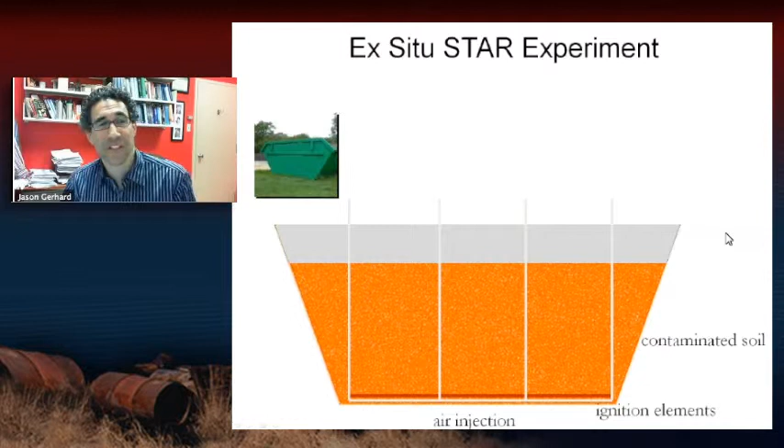We did this demonstration about 5 years ago now. We did it on the cheap with some research budget. This is before any big companies were involved. And we basically took a skip, or what you call a garbage dumpster, and filled it with contaminated soil, and basically ran a large column experiment inside that dumpster. And so just like with everything else you've seen, we do ignition along the bottom, and we get this upward propagation of the reaction front. That's the idea. And hopefully clean up a whole skip full of contaminated soil.

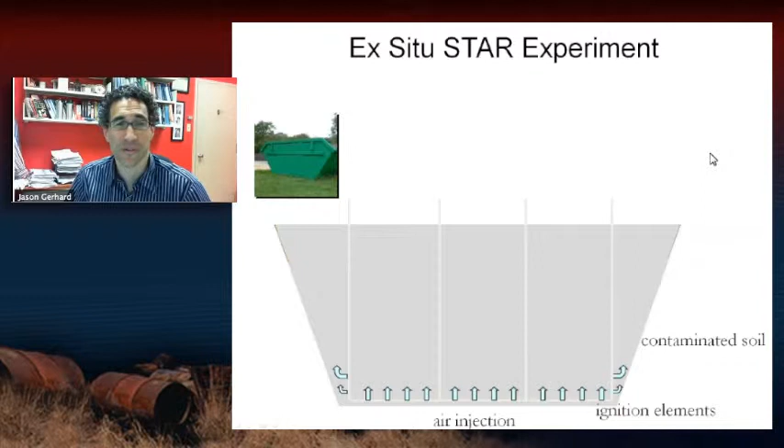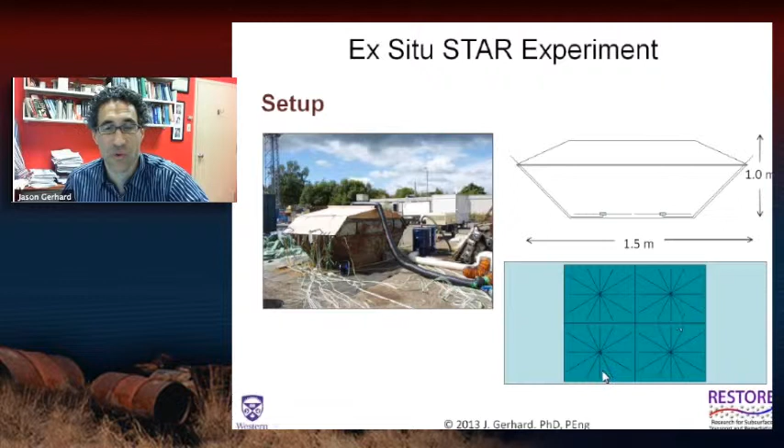So this is the experiment we did in Glasgow on the order of, I gotta say, 5 years ago. And we purposely mixed coal tar with clean sand to create a mixed contaminated soil to our own description. And here's a plan view of the air distribution radial pipes, and the igniters were located in these 4 quadrants on top of these pipes. Here's a side view, and basically this is what it looks like.

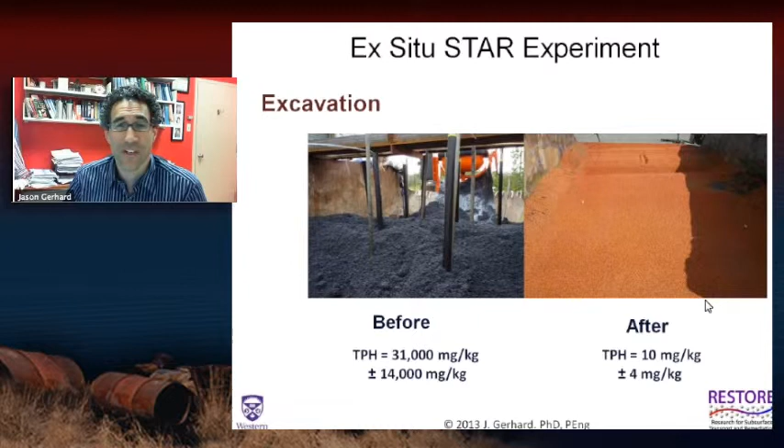This is a photograph of what it looked like before we did the test, and this is a photograph of what it looked like after. It took us about 15 hours to have the reaction propagate up through this zone. It was about 1 meter tall, and it took about 12 hours for it to cool down before we could excavate it. And we got very typical results, again, on the order of 31,000 milligrams per kilogram before, and pretty much clean sand afterwards. You can see, again, this sand had a sort of a reddish tinge to it afterwards because of the iron oxide in the sand. So very, very encouraging.

And it was this kind of result that allowed us to work with a major oil company to develop a prototype ex situ reactor, because, as I said, they have these tank bottoms that they want to treat. Now, the tank bottoms themselves are not a soil. They have a bit of silt and grit in them from the reservoirs where the oil's been pumped out of, but mostly it's just liquid. So it's already on the surface, it's already excavated, sitting inside a lagoon or in a pile, and what we want to do is mix it with sand, treat it in a reactor, get the clean sand back out, and reuse the sand over and over again, mixing it with the sludge and treating it over and over again for very little cost.

So basically, here's what the system looks like. It's basically an igniter that we use during ignition only. The front travels up, it gets clean, it gets dumped out, and it gets done over and over again. We're also working on a continuous system. The reaction would continuously be in here. We keep feeding in fuel from the top, and the reaction would stay inside the reactor. But for the moment, we're starting off with a system that is batch. You treat the system in batch.

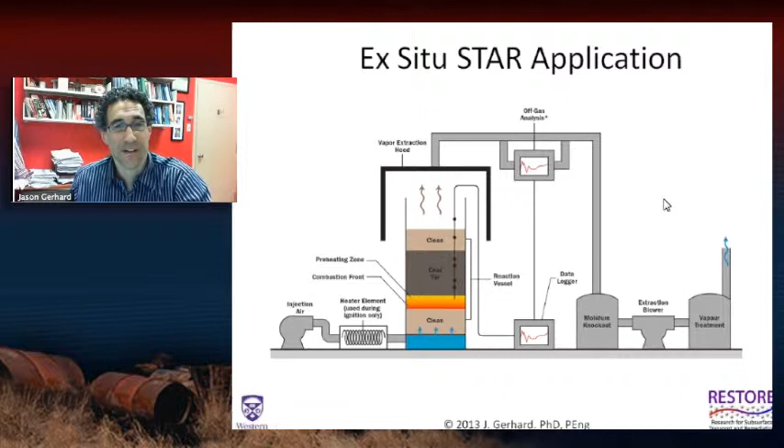And you can see that we have an extraction system, we analyze the gases, and then, just for total safety, even though we have very few vapors, we still treat them with activated carbon and then release the clean air. So this is what it looks like. We've built this over the last year and a half. It's in London, Ontario here, at one of our research facilities. We've partnered up with this company, GTI. They've been fantastic partners. They're experts at fabricating reaction vessels, basically.

This is a 3 meter tall, 1 meter diameter version of our column experiments. It has a very nifty hydraulic mechanism that allows the bottom to come off, to dump out the clean sand. We then put the bottom back and the locking ring closes, and then we actually have a sand elevator here. We have big buckets of sand, a sand reservoir. It brings the sand up, mixes it with the sludge, and dumps it into the top. So we have a loading system. We have an unloading system.

The sand falls down into this bucket here. The ignition system is in the base here. We have air being blown up through here and then collected out the top. And these are thermocouples located all throughout the system, so we can track temperatures. And what's very interesting is the entire apparatus, which is several thousand kilograms, is on these very sensitive load cells. So we can track mass loss as a function of time in real time. And basically, this is a pilot scale, so maybe it's on the order of 1/3 real scale.

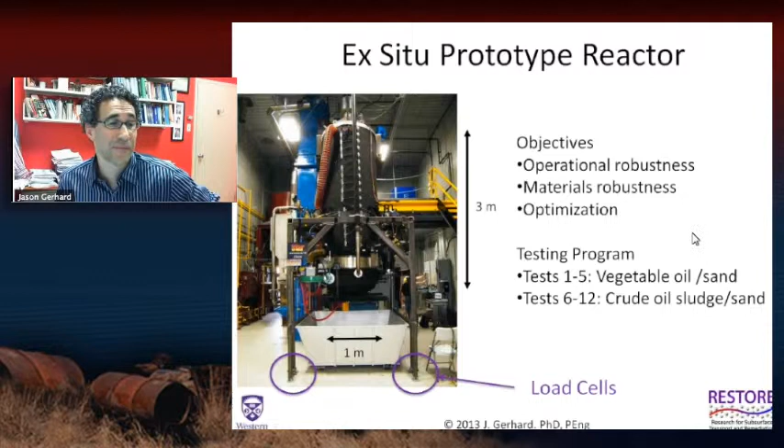The first 5 tests were with vegetable oil, which is a good surrogate contaminant. And then the next 7 tests were with the actual crude oil sludge. So here's an example from one of the tests of the mass destroyed as a function of time. Now we're not using an indirect measure of CO, CO2. We're using a direct measure of the weight of the reactor as a function of time.

So you can see it's basically a linear reaction as the front propagates up the column. We're getting a linear rate of mass destruction. And you can see that the mass destroyed is almost exactly the initial mass added. We basically have nothing left. There's a little bit of sludge that's below the igniter in the reactor, and that's this difference in weight here.

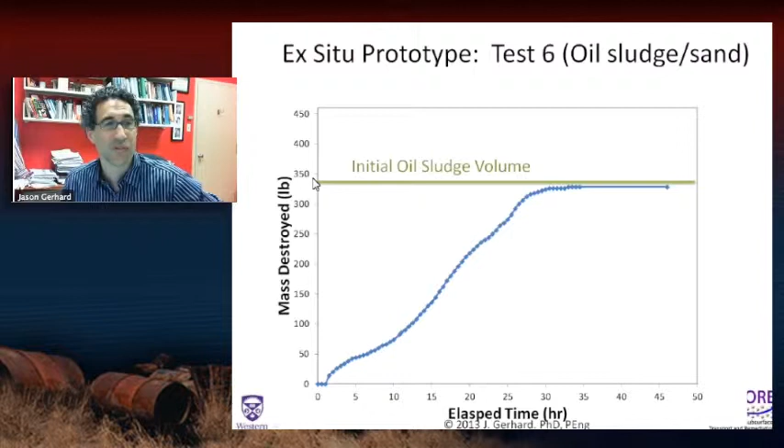Because the treatment, of course, doesn't go down. It only goes up. So there's a little bit of mass left below the igniter, but everything that we tried to treat was completely destroyed. And it took on the order of 35 hours to destroy those almost 350 pounds of sludge. So that's very encouraging. And here's a video of how the temperatures evolved, how the front moved through the reactor as a function of time.

This zone down here is a contaminated zone, and in this test, half of it was contaminated, and half of it was clean sand. So here you can see the reaction starting, the heater's off, and you can see the front moving up, and we see a much thicker front than we did previously. We see a lot of the heat being retained inside the clean sand. So basically we have a very strong reaction propagating up through the soil.

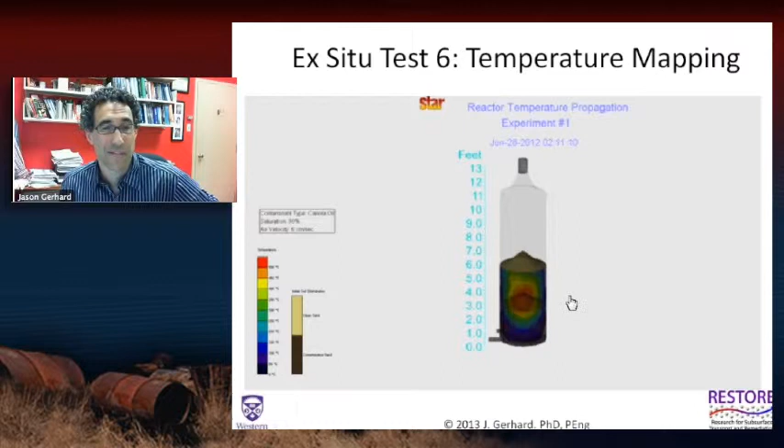You see a strong reaction propagating up through the soil, and then a lot of heat being retained in that clean material at the top, and it very slowly cooling down over the next day or two. And this is what the material looks like. This is the sludge at very high concentration. Of course, we're mixing it ourselves, so we can mix it at any concentration we want. So we pick a very high concentration.

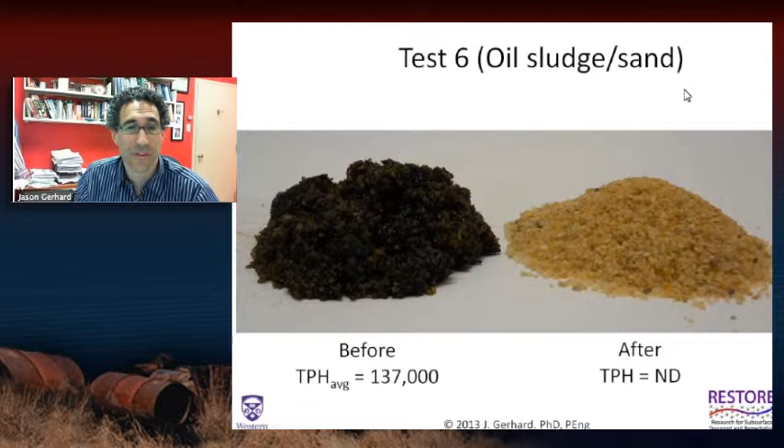And this is what it looks like afterwards. Very, very encouraging. Very similar to our treatability studies. So ex situ STAR is looking very, very good. Of course, there's some advantages over in situ, which is one, you can homogenize the soils and heterogeneity is less of an issue. And of course, it's highly controlled. We can optimize the airflow rate. We can optimize the concentrations as we want them.

If it was too fine of a material, we could add a coarser material. We could do whatever we wanted. We see treatment just like the column tests. We see the possibility for treating liquid wastes that we intentionally mix with sand and we recycle the sand. We see that we could have, for example, a treatment center where we mixed really high concentration waste that had lots of excess energy with some low concentration waste.

Remember, I mentioned that there's some soil that we can't treat normally because there's not enough fuel there. Well, in this case, we can mix the two of them together, throw them in the reactor at the same time, and therefore treat both at once. And of course, we also have design plans for a mobile treatment system that would drive around to different sites. So we could do excavated materials, but not having the excavated material leave the site, which can be a big advantage.

And the treatment's so thorough that some of the soil we've done has been classified as being good enough to be put back into the ground, which for most technologies, you could never do. Even after you treat it, you still have to send it to landfill because it hasn't been treated enough. And if you're trying to, for example, bioremediate petroleum hydrocarbons, that's a typical result. You knock it down a lot, but you don't knock it down enough to reuse it.

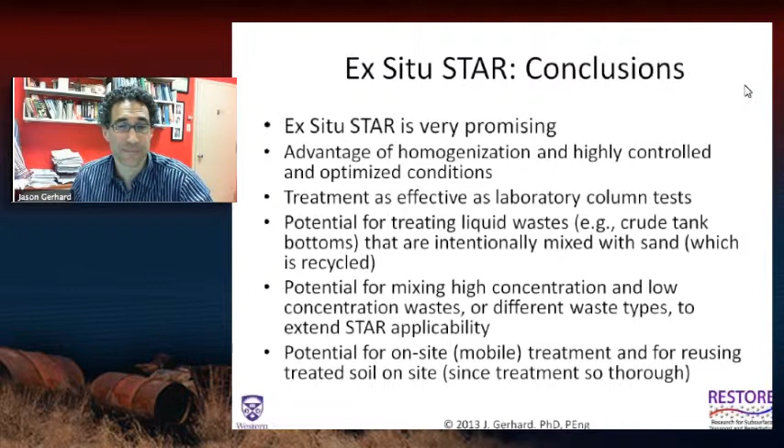The question I have here is, first of all, the comment: that's incredible, forget in situ and just do ex situ. I agree that the ex situ looks very promising. But you have to understand, as I showed you in the sustainability analysis, excavating all soils, first of all, is incredibly expensive in terms of energy.

Second of all, it's hazardous. You're bringing hazardous material up to the surface where it can volatilize, get in contact with people. In many sites, it's either too deep, or it's too expensive, or it's too hazardous to bring the material to the surface. So in situ has a lot of advantages. Of course, there's challenges in terms of the in situ heterogeneity and things like that. But in many cases, in situ treatment is an important alternative.

So thanks, though. And the other question was, could you potentially sell the clean fill? I think I've answered that. Yes. In this case, the material is so clean that there's a lot of potential for putting it back into the site, using it as fill on a development site. It's even been classified as clean enough for fill into harbor development projects where you need to put things into the lake. So those are all possibilities.

The one issue that should be brought up is that it has no organic material in it whatsoever. So for people who are concerned about the viability of the soil as a growing medium, and that can be important if it's a superficial soil, like a potting soil, you have to understand that, like any thermal technology, you're not just destroying the contaminant, you're destroying all the organic carbon. So the organic carbon is lost, and it becomes sterile. You also lose all of the natural organisms that exist there.

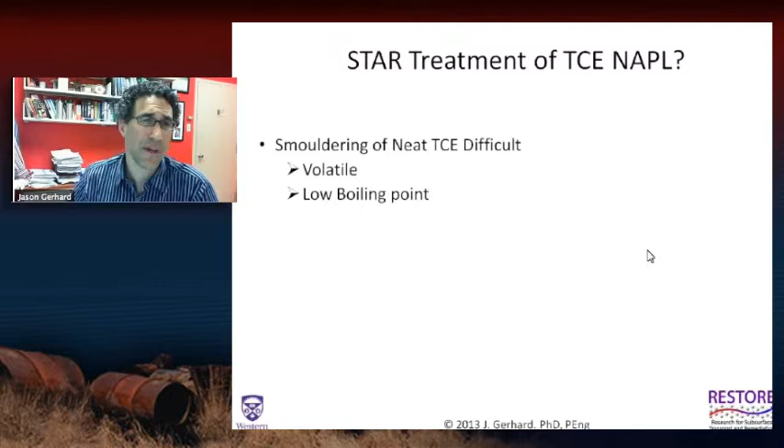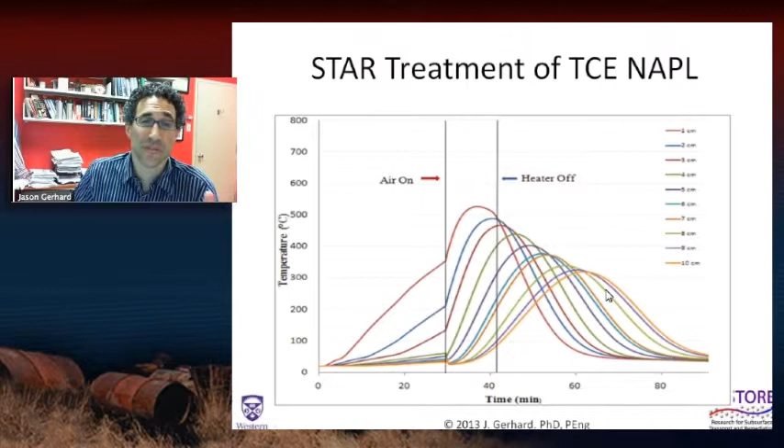So we know already that in a lot of sites where there's chlorinated solvents, we typically inject vegetable oil as an organic substrate donor for aggressive bioremediation. And we know that vegetable oil has a lot of calories, a lot of energy, and it can mix with the DNAPL very effectively, so that they coalesce into a single phase.

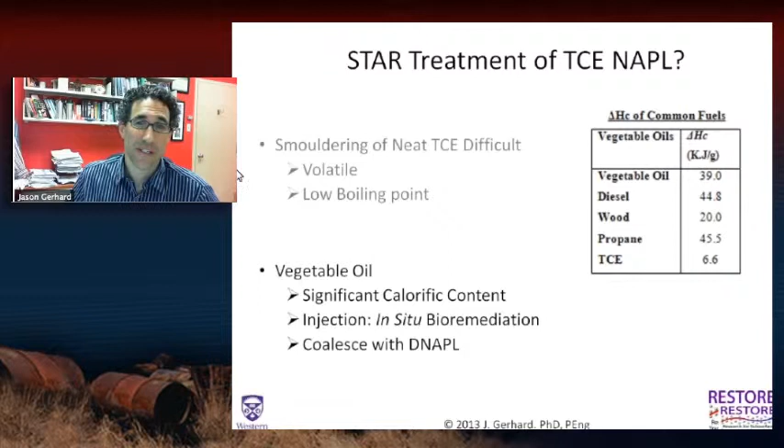And here's the energy content of various fuels. You can see that propane and diesel and wood have fairly high energy content, just like vegetable oil, whereas TCE itself has energy. It can be combusted. It's often incinerated, for example, in an ex situ treatment system, but it doesn't have a lot of its own energy.

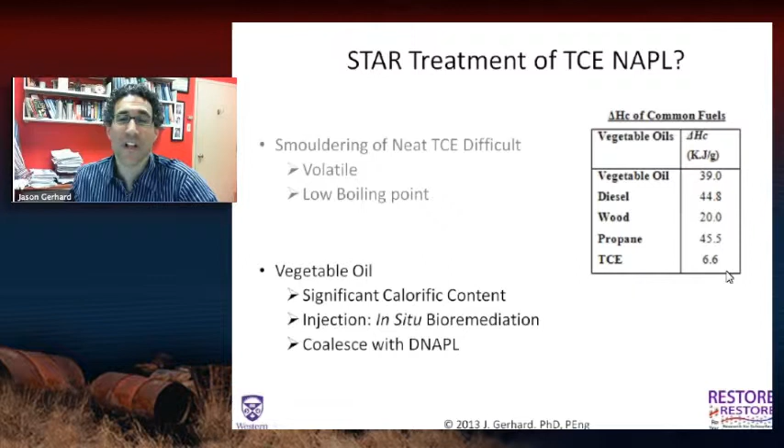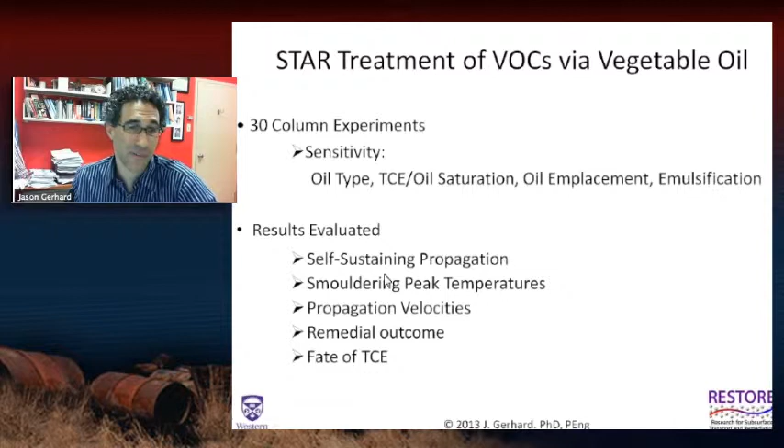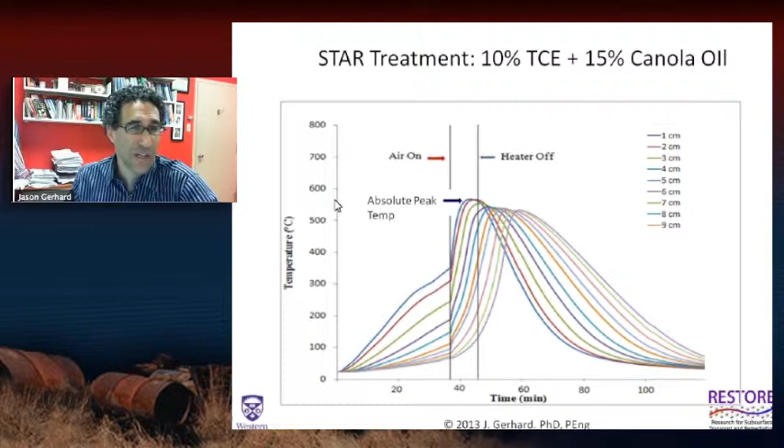So we did a whole suite of experiments where we looked at whether we could use vegetable oil as a surrogate fuel for remediating VOCs, and we looked at all of these factors. This is what happens when you take TCE at 10% of the pore space saturation and mix it with 15% saturation of canola oil. Now we're getting a very nice self-sustaining front, peak temperature about 550 degrees.

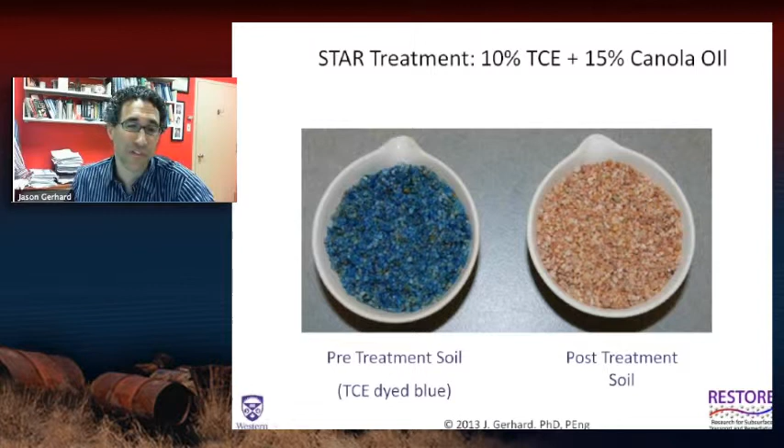And here we used an oil blue dye. This is the blue dye TCE before and after. So we know that there's no TCE left, and there's no vegetable oil left either. And we did a whole bunch of different oils, and we saw that canola, sunflower, and peanut oil were all very promising, strong self-sustaining reactions.

Soybean oil, olive oil, and corn oil had the potential, but at the scale that we were studying them, we couldn't say they were completely self-sustaining. We would need a larger scale test to know for sure. We also did a biofuel, methyl soyate. In that case, it was really not self-sustaining at all.

So I can't tell you why. These all have very similar chemical formulas. So it's hard for me to tell you. I don't know yet why some are better than others. We just know that it's true.

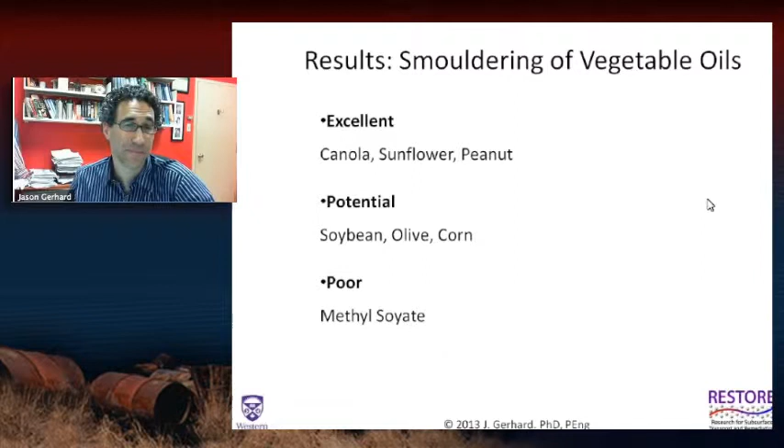Now, what's the fate of the TCE? Here you can see that the initial experiment, one of our base cases, 10% TCE, 15% oil, had 1.3 moles of TCE in it, and this is the mass balance. We measured the TCE in every phase. We basically got 1 mole of TCE being volatilized ahead of the front. At the end of the day, 0 moles of TCE was found in the soil.

It was completely clean. There was a very small amount of gaseous PCE, because you should know that if you incinerate TCE, sometimes one of the byproducts is PCE. So we're measuring PCE, even though we didn't actually add any PCE. A very little bit is being generated in the thermal breakdown of the TCE.

And we also measure for phosgene. Now, phosgene is a chlorinated toxic gas of significant concern whenever you're incinerating TCE. So we measured very carefully for phosgene, and we saw incredibly small amounts, much, much less than the regulatory limits of phosgene. So that's promising.

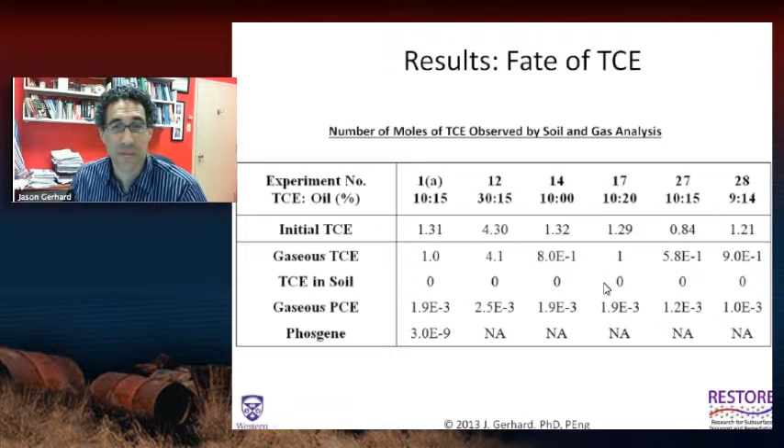Now here's a whole bunch of experiments that shows very similar results. So we did some with more TCE, with less TCE. We did a whole bunch of experiments, and basically none of them had TCE left in the end. And all the results were very similar. Very little PCE generated, a significant fraction emitted as TCE, and the rest of it being combusted.

So if we look at it on a graph, we can see that in every case we remediated the soil, about 3/4 of that TCE was being volatilized, and about 1/4 of it was being destroyed. A tiny bit was being emitted as PCE. So on one hand you might think that's disappointing, because STAR was so successful with destroying with very little emissions for the coal tars, creosotes, and crude oils. But the truth is, this still has a strong potential.

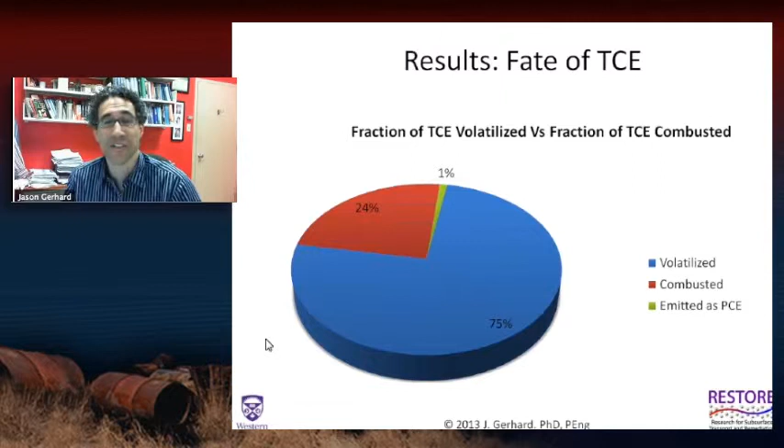Other ways that we treat TCE are, for example, volatilization, either through thermal, which means injecting a large amount of energy into the soil for maybe 6 months and volatilizing all of it, so you're trying to heat up the entire site at once to maybe 100 degrees. Or you're doing air sparging and purposely volatilizing. So there's a lot of ways of transferring TCE to the gas phase. And this just might be a very cost-effective way of doing that, and destroying some of it in the process.

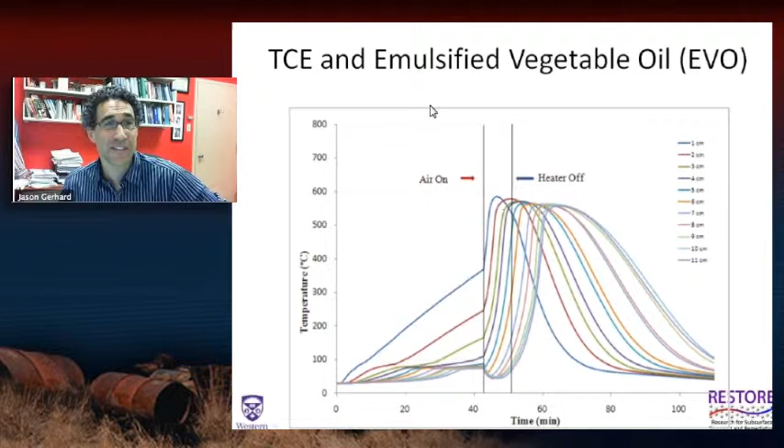Here we looked both at neat oil, and of course at emulsified vegetable oil, because when you inject oil into the ground, if you want to get a good radius of influence around your injection well, you often inject emulsified oil, which is basically droplets of oil encapsulated inside water, so that you can push those droplets further away. So we did it with EVO and TCE, and we had equally good success, which is promising.

Now in this case, we're pre-mixing the EVO, the TCE, and the soil. In this case, we took a clean sand column, and we injected vegetable oil and TCE. So we injected TCE first, and then drained it to residual. Then we injected vegetable oil, and then drained it out as well. And then we did the reaction. So we're trying to do things closer to what would happen in the field.

And what you see is we don't have nearly as nice a set of curves, because there is some heterogeneity. There's some places that are more packed than others. There's some places that have more fuel than others, some more oil than others. But what we see is basically the reaction does propagate through the entire column. Remember, these thermocouples are only on the center line. So it could be moving in a kind of heterogeneous fashion.

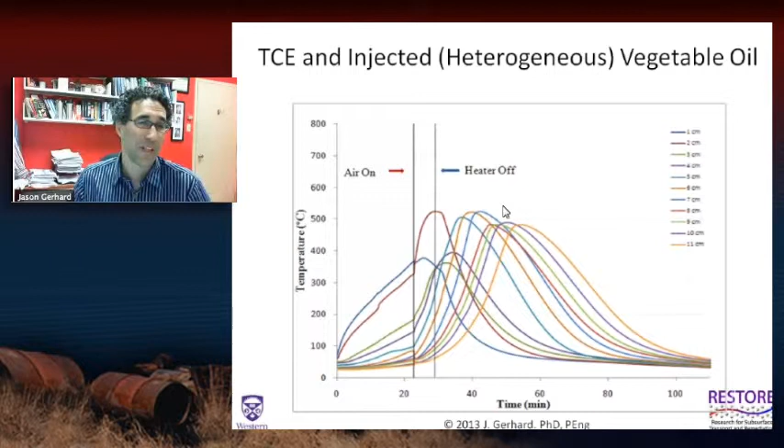But in the end, the entire column was completely clean, and there was nothing left in terms of oil or TCE. So we do see that there's good potential for remediating any kind of volatiles using vegetable oil as a supplementary fuel. Certainly really cheap and food grade oil. I mean, whenever you want to inject something into the subsurface, it's nice to inject something that's food grade and has no toxic implications.

It's also likely that any oil that you don't smolder will probably support ongoing bioremediation. So we're looking at that now as well, coupling STAR with bioremediation. We saw that there is a minimum of oil that you would need. So, for example, we needed at least 14,000 milligrams per kilogram of oil to destroy 8,000 and upwards milligrams per kilogram of TCE NAPL.

But 3/4 we were volatilizing, 1/4 destroying, and everything was totally clean afterwards. So there is some potential there. Whereas a few years ago, if you asked me, I would have said that there was no potential for volatile fuels. So that is encouraging.

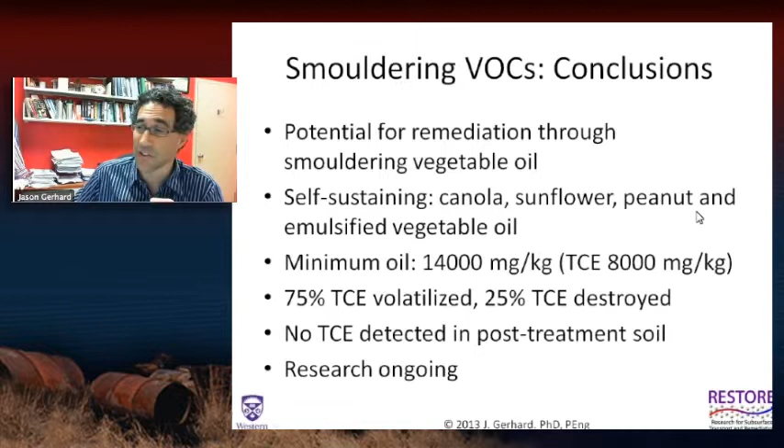Is there a risk of volatilized DNAPL transferring to the dissolved phase groundwater as it contacts the cooler groundwater on the fringes of the treatment area? And so yes, that is true. If you were doing treatment at depth, then you can have some of the gas phase partition into the groundwater. Now, probably if you're dealing with a TCE contaminated site, that groundwater already has TCE in it. So it would be site specific. I'm not sure if you're going to create a groundwater plume where you didn't have one before.

As you continue to sparge more and more air, you'd have some forward transfer of TCE, let's say, into the groundwater. Then if you continue to put air in, even after the reaction is done, you might have back partitioning out of the groundwater. So, as I said, there might be already TCE in the groundwater, but there is the potential for that. It's not something that we've studied in depth, but it is something definitely to keep in mind and consider.

Now, it also depends if you drive off all the water or not, depending on how shallow you do. For example, in our shallow in situ test, the reaction was so strong, it basically dried out that entire cell. And then groundwater flowed back in later, but there was no water between the front and the surface. So in that case, you don't have to worry about contaminating the groundwater. But if you're doing it very deep, then probably you are transferring the hot gas through cooler groundwater, and so that becomes more of a consideration, for sure. So thanks, that was a good question.

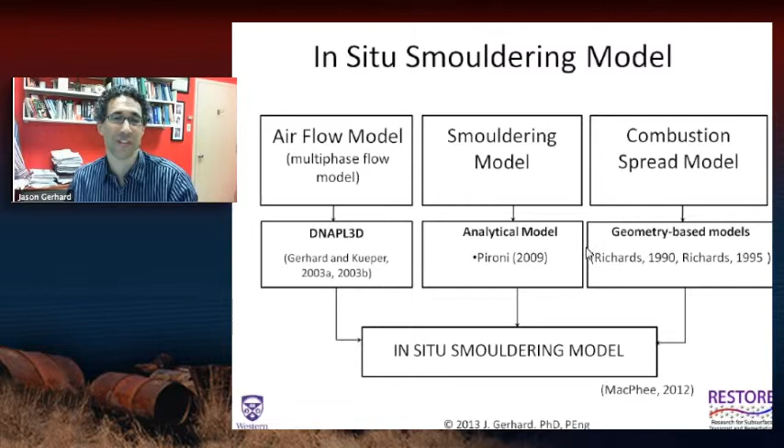So in this type of modeling we're not modeling the detailed physics of the hundreds of reactions going on inside the front. We have another model where we're trying to do that, but it only works on the scale of centimeters because it's so numerically complex. Here we're trying to make a model that's not as complex, but we can actually use to do field scale simulations. So we're trying to incorporate just what's essential of the processes going on.

Now, this is pretty complicated. I don't expect you to learn this whole thing. I just want you to get an idea that we have a multi-phase flow model that solves for the movement of the NAPL and the movement of the air. At every time step, it solves for the air velocity vectors throughout the pore space, where the air is and how fast it's moving, and the concentration of NAPL at that location. That's a model I developed during my PhD.

Then we feed in the concentration of NAPL at every location and the direction and magnitude of the air velocity vector. All of these things and the porosity of that location get fed into this reaction expression, which calculates the velocity of the front.

Because a lot of these things are constant for a given fuel. And then, oops. Oh, okay. So for a moment, I just want to mention now, this expression has a calibration parameter. So what we did is we took all of the column experiments that we did, and we developed a calibration. So we get a certain velocity of fuel, of contaminant, for a given air flux.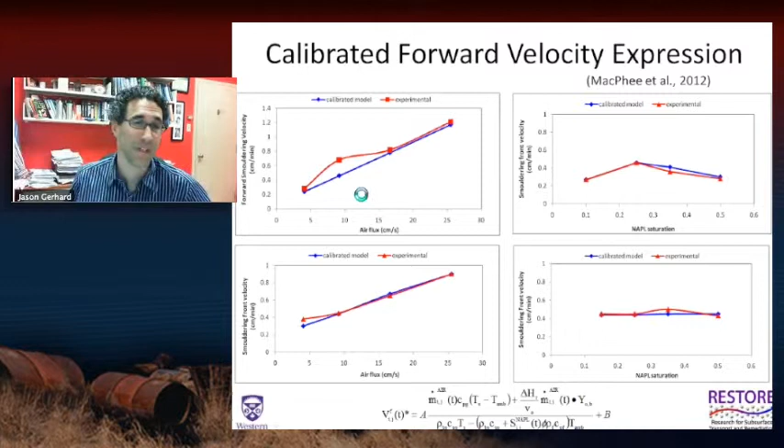And at each node in the model, you can have a different saturation, and you can have a different air flux, and the model will give you a different velocity. Okay, and that's solved on a node-by-node basis throughout the entire domain. All right. Then, basically, it goes into a module that calculates if it should spread. Because remember I told you if the airflow is too low, there'll be no reaction, so that's what this is. There's an off-on criteria here.

If it's below the criteria, then the front doesn't spread at all. If it's above the criteria, then we use these values that we calibrated to our two-dimensional experiments, and it creates a front that propagates outwards from the ignition point. And then what it does is it just iterates to basically make a nice smooth front, and then it removes instantaneously all of the NAPL behind the front.

So this is how it's not a true chemistry model. It's not actually doing the stoichiometry of reaction. It's calculating where the front is in space and time, and the movement of that front, and everything behind it is removed for NAPL. But that's really an important step, because when you go back into this time step, then the saturation distribution changes, and that changes the airflow pattern. And that's why I was telling you before, you can't just predict where the airflow is going to go and assume the front's going to go there, because here is a very coupled process.

The airflow is very dependent on the NAPL distribution. As you know, hopefully from other courses, when you have lots of NAPL, it's hard for air to flow, and where there's little NAPL, air can flow well, right? And so you can imagine that there's a clean zone through which air is moving very, very well, and the air can propagate from your ignition point right to the front very easily. And then when it reaches the front, of course, it doesn't move through that front as effectively. And so there's a coupling here between the airflow and the NAPL saturation, which is affected by the propagation of the front. And it helps deliver air right to the front.

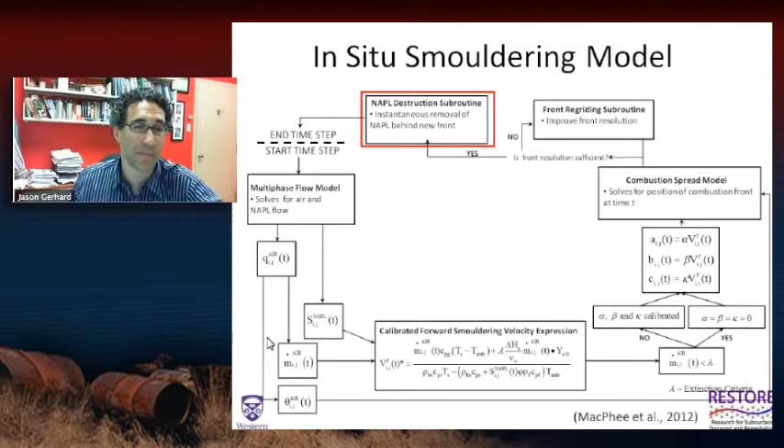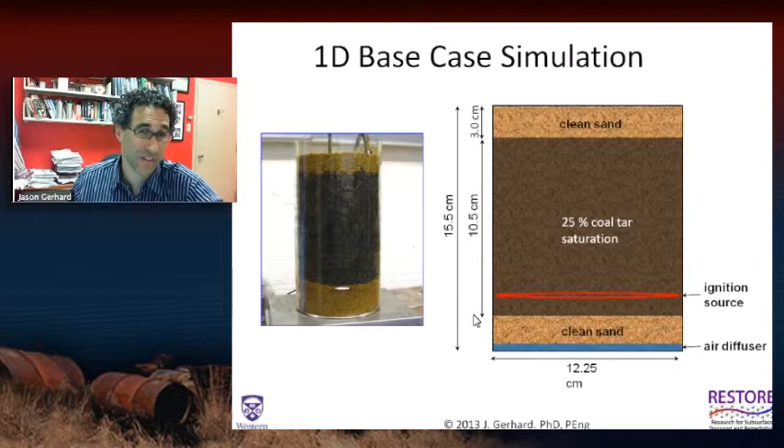All right. And the nice thing is, I should mention, it also accounts for water saturation. But of course, if there's a dry zone behind the front, then it also allows the air to reach the front very effectively. Okay. So here's the column experiment I showed you way back about 2 hours ago. And here's the propagation of the front up the column in terms of the simulation. Okay, so here's the air velocity vectors, and of course, they're uniform. This is a 1D experiment. So the air velocity vectors are going upwards uniformly from the air diffuser at the bottom.

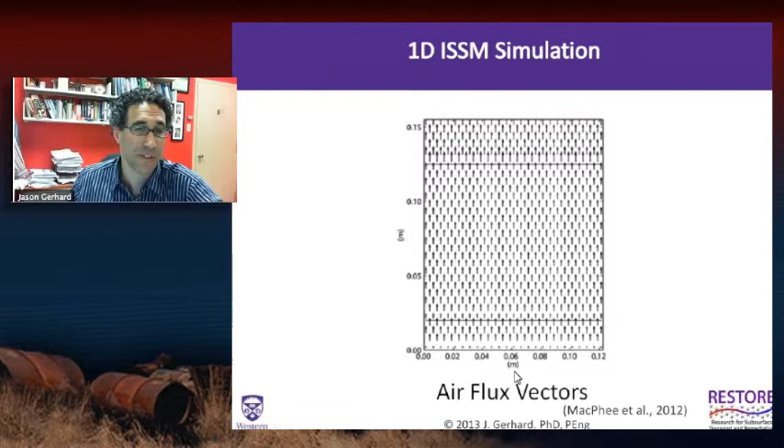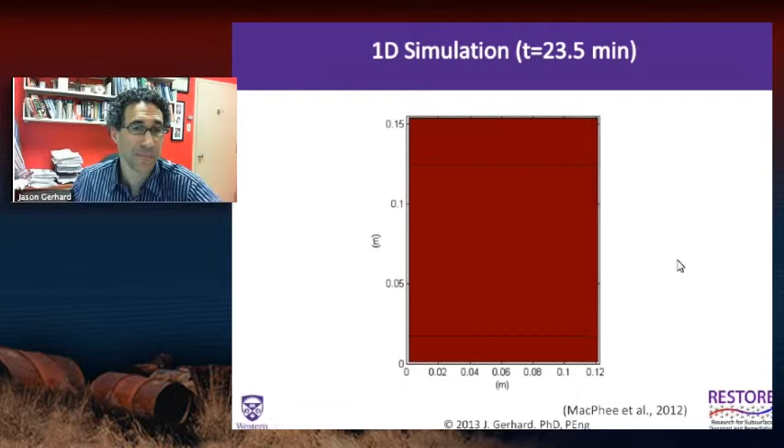And here's how the front is simulated. Here's the igniter at this location. Red here is clean. Blue is contaminated. And here it shows the front propagating upwards as predicted by the model as a function of time until the whole column is clean. It takes about 23 minutes to clean up this column. And that matches very, very well with the experiment. Now, of course it matches well because we calibrated the velocity of the front to the experiment. So it's just encouraging that it matches, but not really revolutionary.

Here's an experiment. Now, this is something it's very hard for us to do in the lab. We've taken the same sandbox now, and we've done 3 different permeabilities: a very low permeability material, a high permeability material, and an intermediate one. Okay, because we want to start to study. And now, instead of doing a line source, we've done a point source, because we want to really study how heterogeneity might affect the propagation of the front. So this we don't have any confirmation for. This is a prediction of the model.

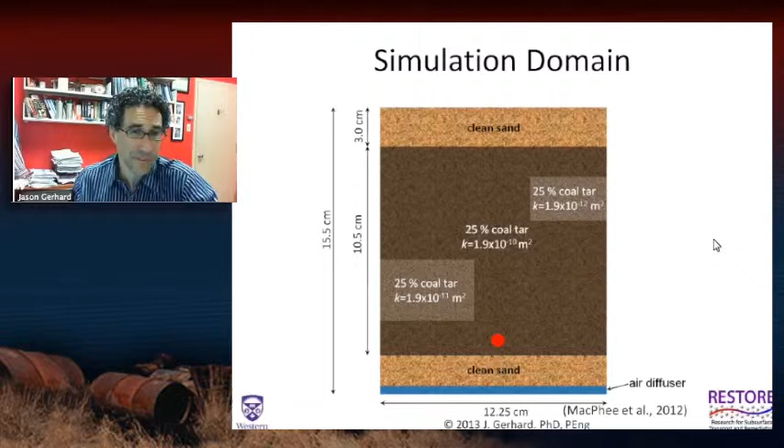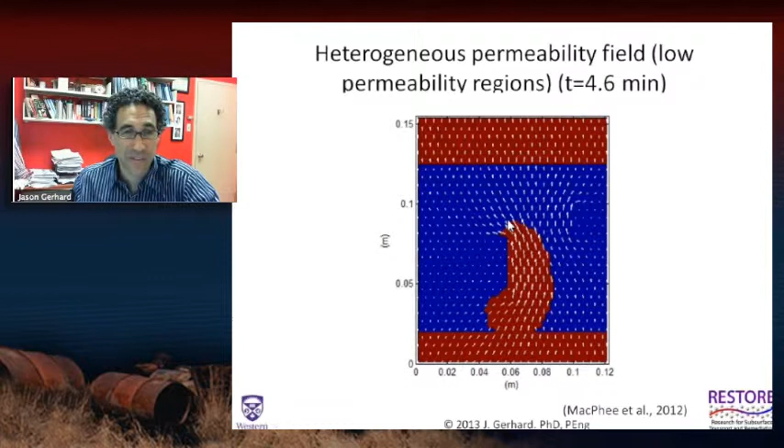So first of all, here's the airflow pattern that's predicted at time 0. And as you can see, as you imagine, most of the airflow is channeled through the coarse sand. There's a little airflow going through the fine sand and almost no airflow going through the very, very fine sand. And when we start to ignite, we can see that we get this interesting shape of the smoldering front, and it spreads as a function of the airflow rate. You can see here that it moves fastest upwards, as we would expect, and then more slowly outwards to the side.

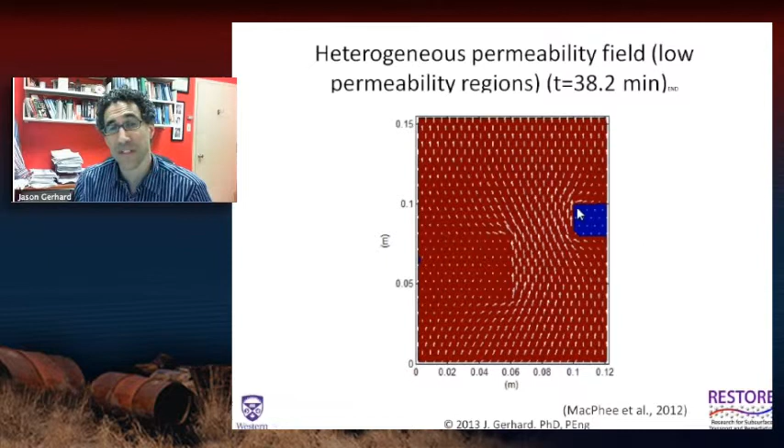And so at the end of time, you see that this is the final time step. We've cleaned up most of the column, but there is a concern here that we could have regions that get bypassed.

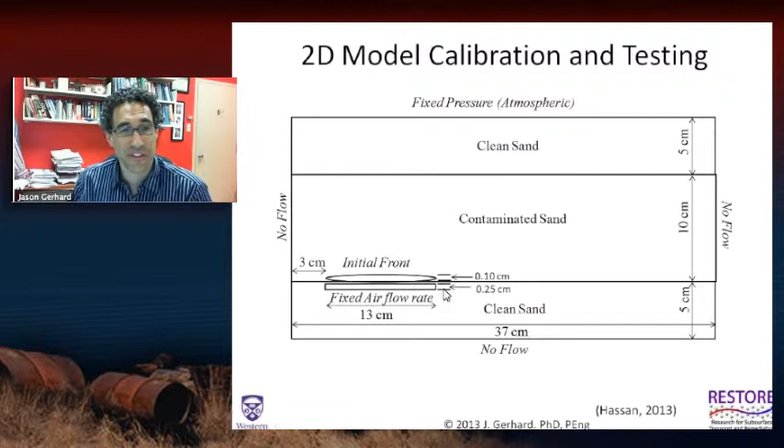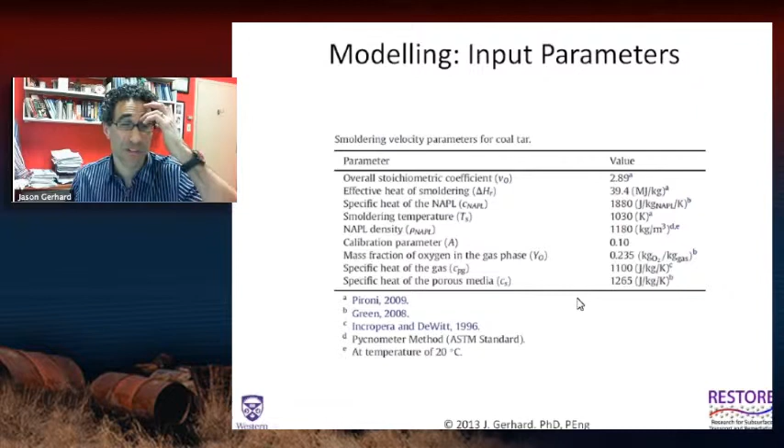Now here's the simulation of the 2D experiment that I showed you before. This is the contaminated material, and we have ignition and airflow at one location. And now we're going to simulate the same experiment that I showed you before. This is just for your reference later. Here's all the various parameters that we take from the literature for the various inputs to the model. These are the thermodynamic properties,

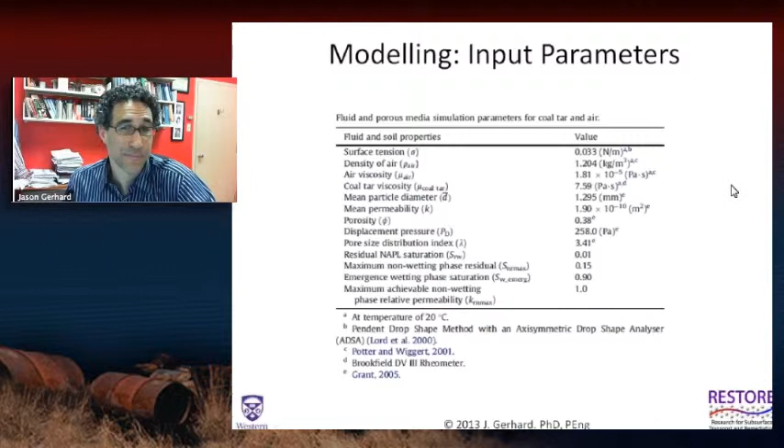and these are the porous media properties. And so here's now the simulation of that front that I showed you for that experiment that we did, the 2D experiment. And we see it mushrooming outwards from the reaction zone. And now it moves very quickly through this phase. But you can imagine that once it hits the top, now most of the air is just going straight upwards and outwards. This is a clean sand up here. So there's really very little resistance.

And so the airflow vectors change dramatically between this point when they're pushing out in all directions and this point when they're primarily going upwards. But we still see some outwards lateral propagation, but it slows down and slows down and slows down until eventually the reaction goes extinct, right here at 56 minutes.

The reaction terminates itself. And a lot of the work by my latest graduate student, Tanzir Hassan, was on developing an extinction mechanism to make sure the model actually extinguished at that point. And what we programmed was that when the airflow vectors are small enough, the reaction will go out. It needs a minimum airflow for it to continue.

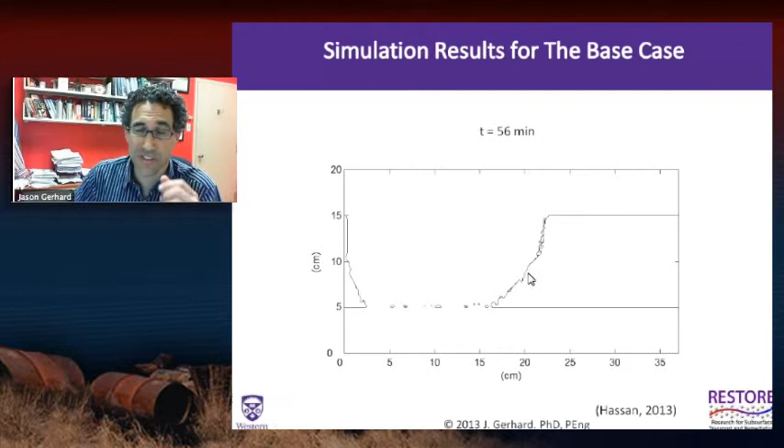So now here's the forward velocity. Remember I told you it was linear in the experiments. That's the circles. Here's the predicted forward velocity. So it's a very, very good match, including the zero velocity when the airflow rate was too low. So this is really encouraging. This is for the 2D experiments.

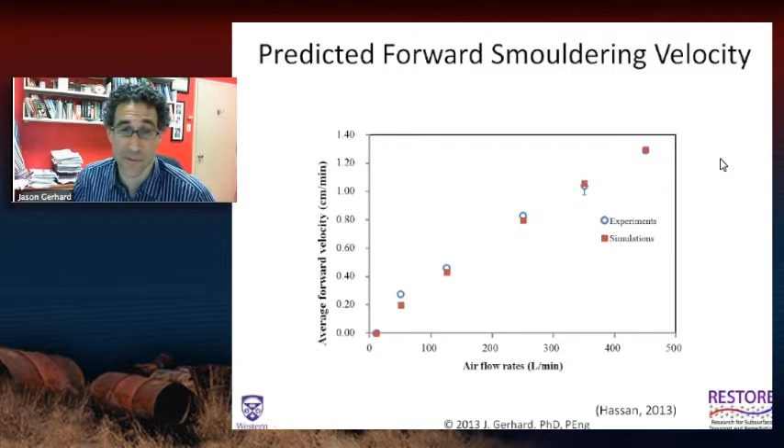And this is now a comparison. You remember these diamonds, triangles, circles, and squares I showed you earlier, where we were anticipating where the front is based on where the red circles were? This is the thermal severity criteria. So now we're comparing the simulated results of the model with these experimental results. And we get an extremely, extremely good match. This is the predicted final location of the front and the actual excavated location of the front. So we're getting really good predictions of our 2D experiments, which is really promising.

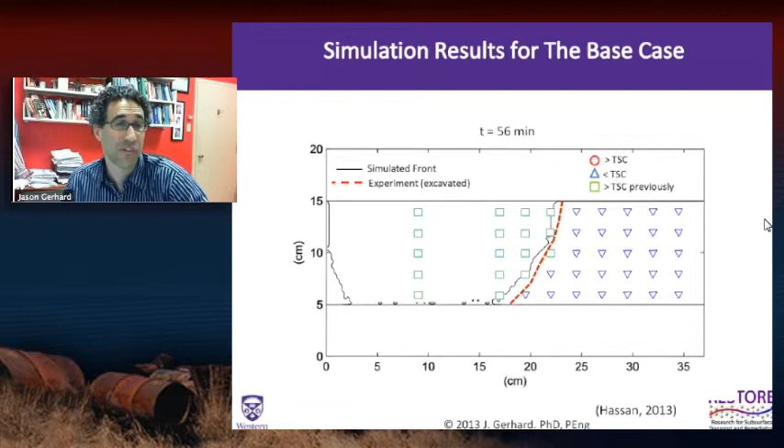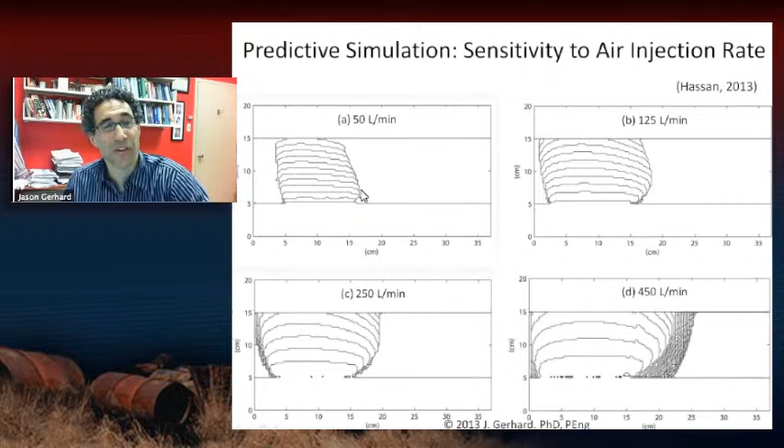And now we can look at the effect of airflow rate using the model, and we can see, similar to what I showed you before in the experiments, these propagation fronts as a function of time. First of all, we see it moving very slowly at low airflow rates and very quickly at high airflow rates, and we also see this radius of influence being quite different at the high airflow rates than the low airflow rates. So the modeling is showing us things that we've already learned through the other sections of this lecture.

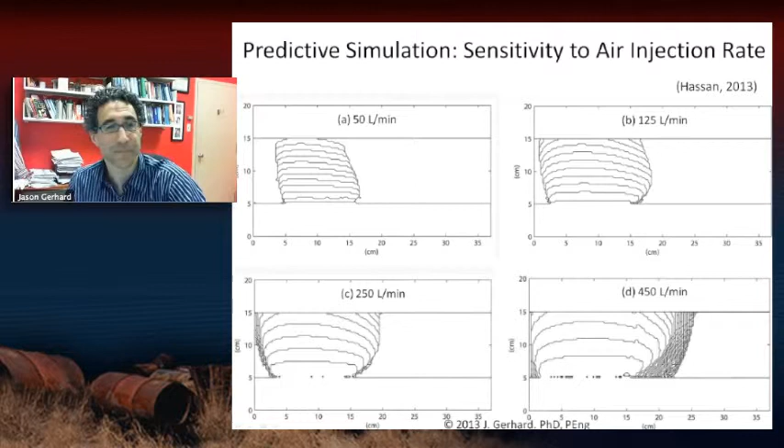Here is, now, of course, the value, and Professor Molson talked about this. Of course, we need to validate or calibrate our models, or develop confidence in our models, by comparing them to very carefully controlled experiments. But the value of the model, once you have confidence that it's working well, is to look at field scale scenarios that you otherwise couldn't. These obviously are experiments. It took us 3 years to do those in situ pilot trials, to set everything up, plan it, execute, analyze it. We don't get to do this very often.

Whereas now, we can take this model and we can run tons of different scenarios and look at, for example, a single ignition source versus multiple ignition sources. We can look at vertical ignition wells versus horizontal ignition wells. We can do all sorts of things with heterogeneity using the model, which is really encouraging, and this is how we can take the science forward and help design the most effective field scale systems.

So here's an example of a scenario that looks remarkably similar to the near-surface pilot test that we ran. We have a well, we have a clay layer, we have a coal tar layer, we have the water table up here, and we have our ignition source, and we're going to do some simulations and look at some sensitivity analysis. You know, I would never say that a model is great for telling you exactly what's going to happen in the field. The field is just too complicated to represent all of that in a model.

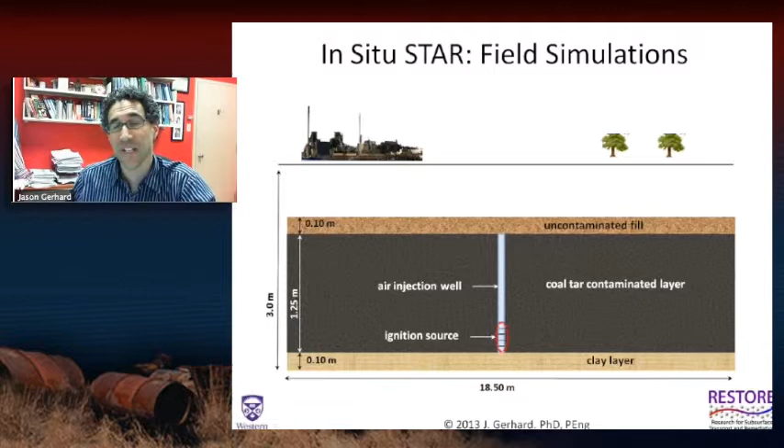But what it is good for is looking at how the results might be sensitive to various parameters. So for example, here we're looking at the sensitivity to coal tar saturation. Our base case is 50% of the pore space occupied by coal tar. But we said, well, what if it was only 25%? Or if it was 75%?

And here we're going to step through time with the model and look at how the saturation controls the radius of influence over time. So after 126 hours, you can see that we predicted, in this case, now here we're using a very, very high air injection rate, so I'm not sure if this radius of influence is entirely correct, but what we're saying is that the radius of influence will be significantly larger for lower saturations of coal tar, and you can see the kind of sensitivity that we expect.

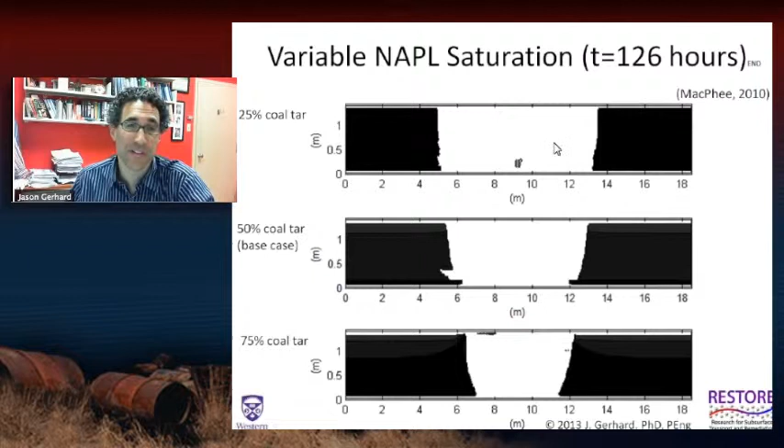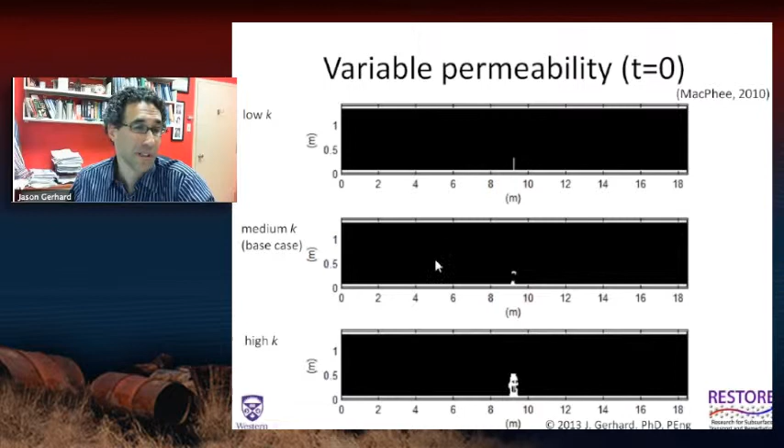Here we're doing the same kind of thing with permeability. Here we have a low permeability aquifer, a medium permeability, and a high permeability aquifer to look at its effect on the radius of influence. And as you expect, we have much faster propagation in the higher permeability area because it's a function of the airflow, the rate at which you're delivering oxygen to the front.

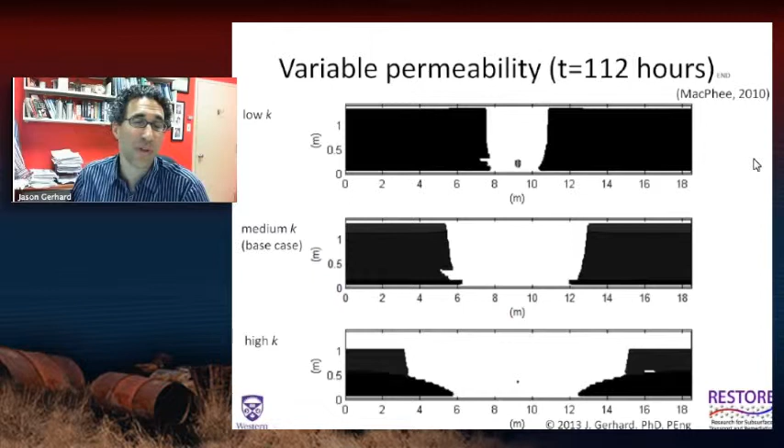So you can see as the simulation progresses that we get quite different distributions of the front, different rates of cleanup as a function of permeability. So that's not surprising, but it's nice that we can use the model now to explore these issues. This is a theoretical site, but of course we can also do it for real sites. We can put in the real permeability and real details from these sites and try to optimize the design of remediation technology.

So in terms of modeling, what can we say? We've got a novel in situ smoldering model developed, which can be used for both ex situ and in situ applications. We've calibrated both 1D and 2D lab experiments, and we're now going to start doing three-dimensional experiments, so we have three-dimensional propagation. I have a PhD student who's working on that now.

We've calibrated just to one experiment in the 2D case, but then shown that it can properly reproduce all the other cases. So that gives us confidence that it is working properly, and particularly it's properly simulating the extinction boundary. It's going to be a valuable tool for us for exploring the influence of site and engineering factors, as I mentioned, and hopefully for designing some full-scale field applications.

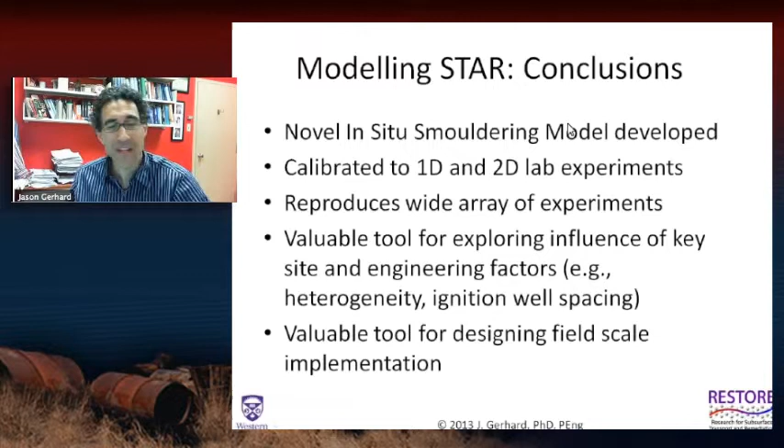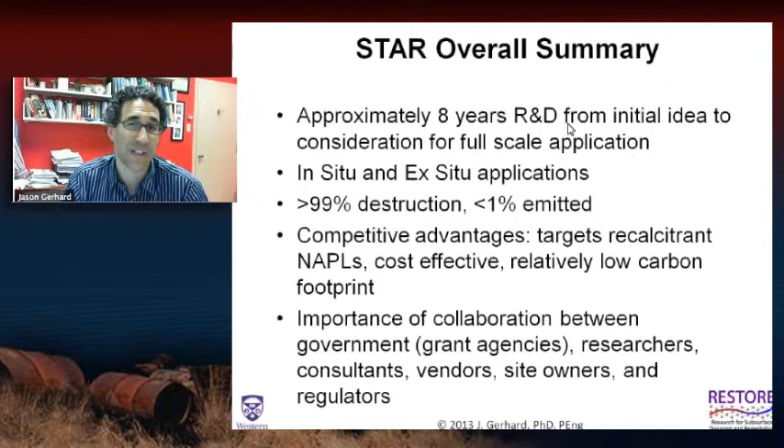So, like with any remediation technology, we've had to take something over 8 years. Early on, it was really just a blue skies idea that maybe NAPL droplets could actually smolder since they're embedded in a porous medium. And you can see we've taken it all the way to in situ and ex situ trials where we have a lot of site owners and regulators and companies that are very excited about taking this to full-scale application. And for most contaminants, particularly the heavy hydrocarbons that it works most effectively on, we're getting the majority being destroyed and very little being emitted.

And some of its advantages against other technologies, or some of the places that you want to think about using this, is when you have a lot of NAPL, when you have really recalcitrant long-chain hydrocarbon NAPL, when you want to minimize the amount of energy you're using, and you want to either treat soil that was already at the surface or excavate and reintroduce the same treated soil back to the subsurface, or if you want to treat it in place in situ.

And this whole project over 8 years is really, and I hope one message you take away from this, is that when you're developing a new technology and you're proving it at all these different scales, there's real importance in the collaboration between the granting agencies that give us funding for the research. We have a big team that's collaborating around the world trying to understand and develop this. And we're trying to develop very fundamental science at the same time as proving things in the field. And these all happen simultaneously.

We have consultants that are linking up with site clients and helping do the site investigation and application, a really important part of the engineering team. Site owners have to be on board and help take a risk to help you prove this on their site, and also getting the regulators on board, so that they see that this is a really positive step forward and that they're in favor of supporting these tests.